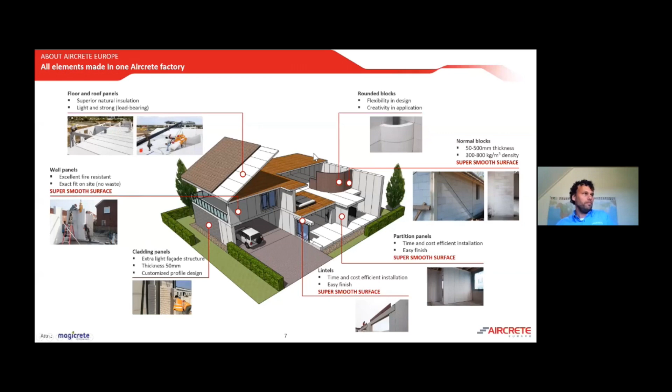Here, a brief description of all those products. You see the large reinforced wall panels with the specific characteristics. They can go up to a length of 8 meters. Of course, this depends on the mold you use during production. The common molds we use are 6 meters, but in special cases we can go even up to 8 meters, which means that you can make panels of 8 meter length, which is a small market so far worldwide.

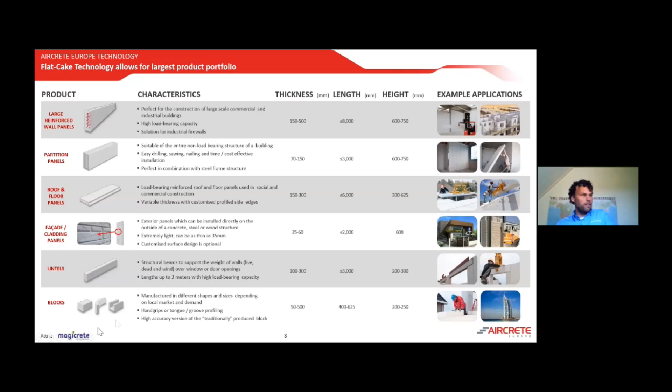Most common is the 6 meter length, which means you can make 2 partitions out of 1 mold, or if you have 2 meter partition walls, you can make 3. Roof and floor panels, of course, being used, the so-called cladding panels, here with a look of a normal brick. Lintels are already used, I think, in India, and of course, all kinds of standard and special blocks can be produced.

This one goes further into detail. You see here the cladding thin wall panels, as well as the partition panels, a very thin product with only 1 mesh, or even, in some countries where they use partition panels, with only a simple reinforcement of steel bars only, without welding.

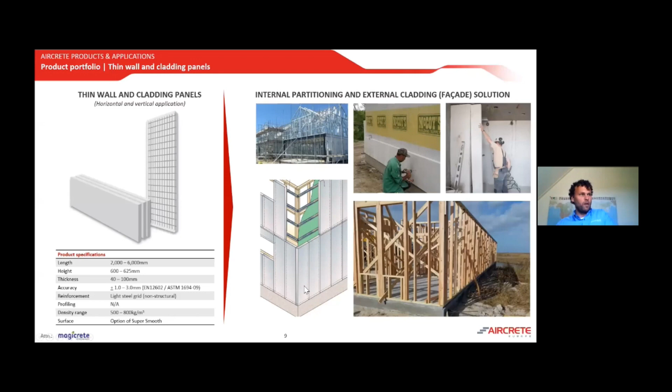Of course, coating is very important, as already mentioned by Viral in his presentation. And here you can see you can use it with timber frames, and then you can attach the cladding panels to it.

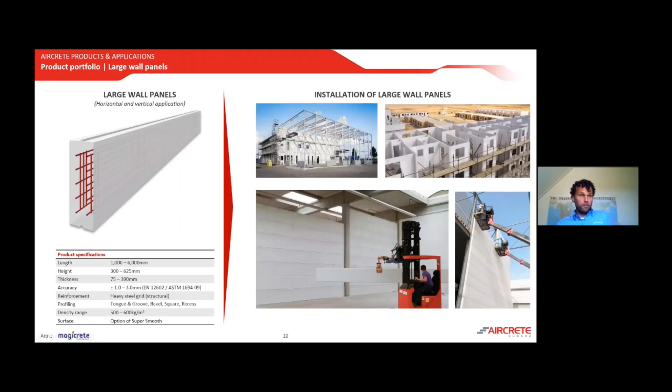Here you see large wall panels, mainly used for factory buildings, easy to install and to combine with concrete structures or steel structures. Also for high-rise factory halls, it's widely used in a lot of countries.

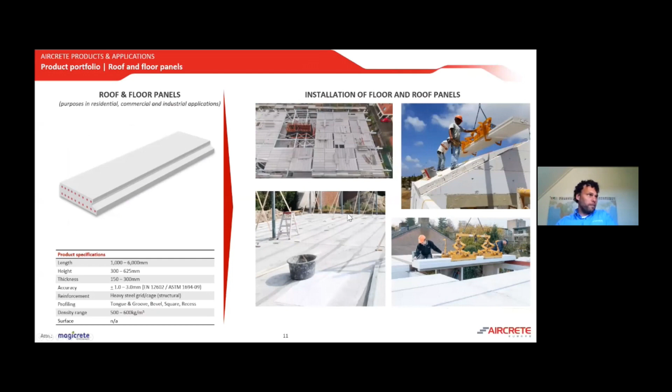Roof and floor panels, widely used everywhere in Europe, also in countries like Korea, South America. Nowadays, the market is increasing, and I think also for India there will be a future market for this kind of products. The lintels, as already discussed, above doors, windows, you will need them. You can use them in inside walls, outside walls.

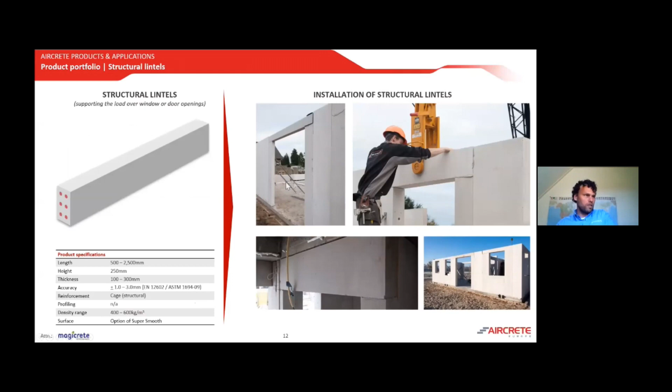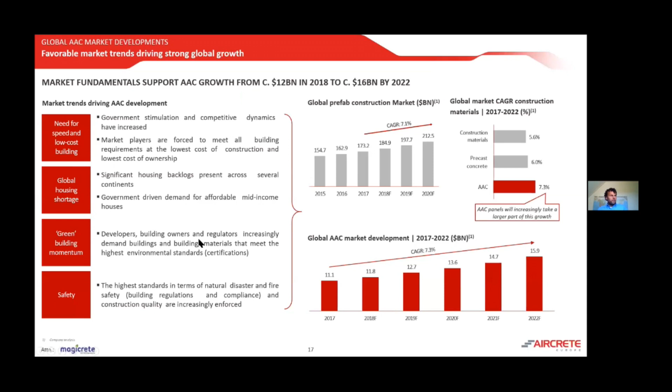I will not mention anything about the figures right now. Just read through the presentation afterwards, I would say. And here, again, it's about those 4 topics and the growing potential of the AAC panel technology in the building industry. In this slide, again, those 4 trends, and here it's shown per specific region what the potential is and what the expectations are for the future.

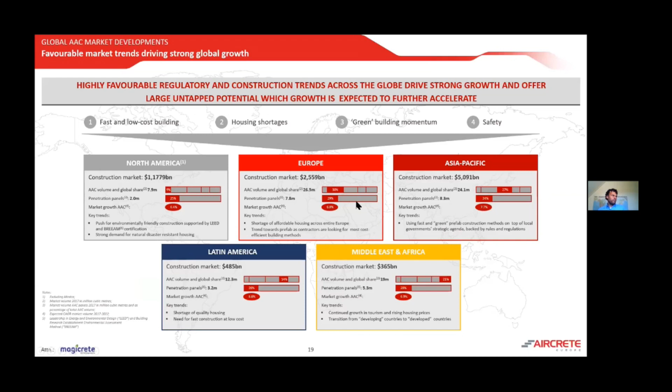Altogether, the demand for the prefab industry is growing. That means the demand for AAC panels is growing, and that means that it's more important in future to have a look at the production technology, how to produce good quality panels to reduce the risk and the reject products during production.